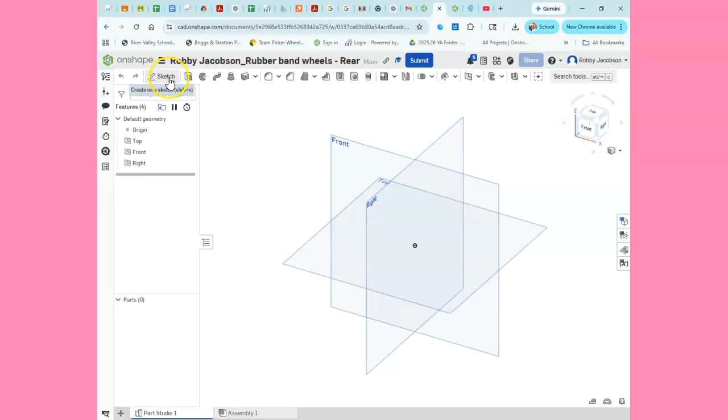So once again, once you're logged into Onshape, you can go to your classes. Go ahead and choose your class. You should have your front wheels submitted. You'll see that in the status. Now we're going to go ahead and click on the rear wheels and start with our assignment. Excuse me. Go ahead and choose whichever view you want. I'm going to choose from the top view and get started with my wheels.

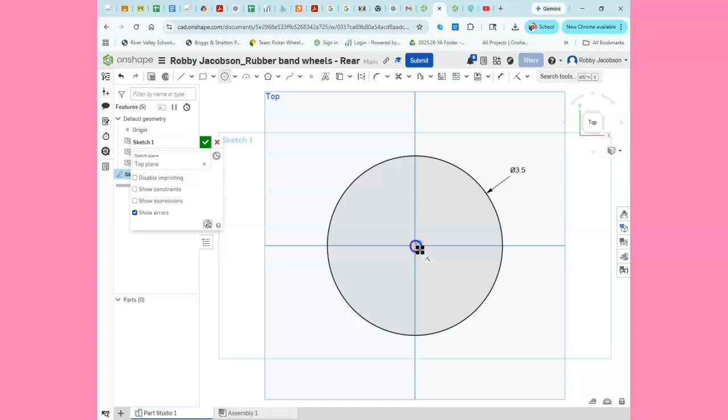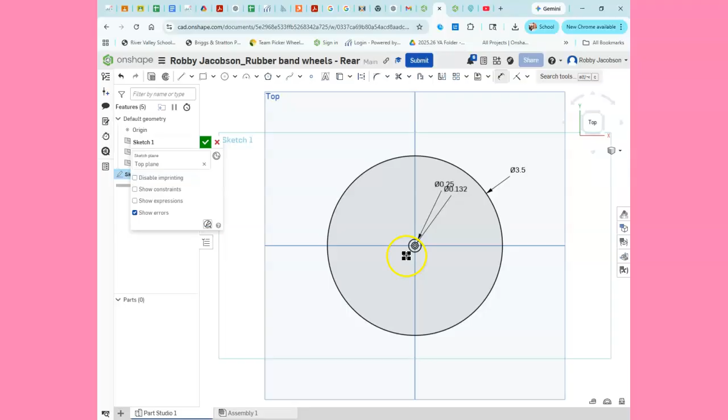So rear wheels are going to be a little bit bigger, so I'm going to make those 3.5 inches in diameter. So my 3.5 here. Once again, I'm going to start with a couple circles in the middle here. I'll start with 2. And my axle hole is going to be 3.35 millimeters. It's just the diameter of the axles we're using. And then I'm going to make this 0.25 for that diameter, which is just the outside of that axle.

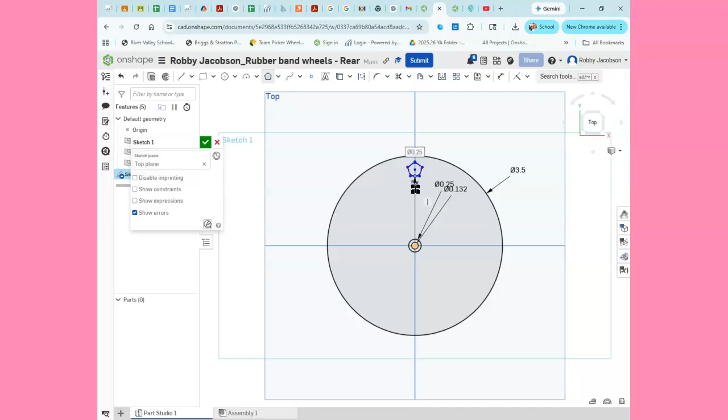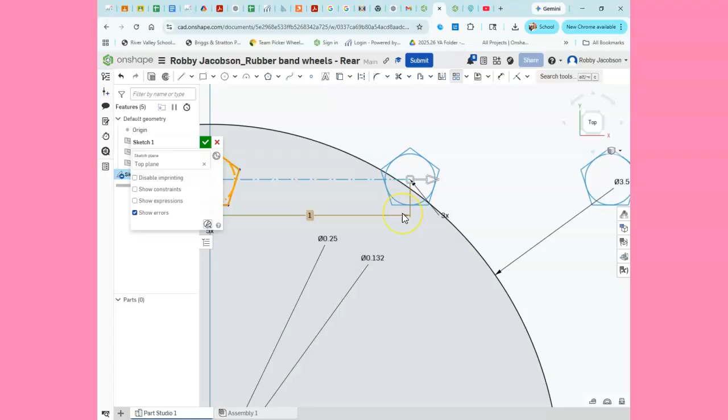And at this point, I can go ahead and create my design. And I can do very similar to what I had on my other one, or I can go even a little bit crazier. So maybe I want to add a couple of these. So one way I can do it is I can make a linear pattern for my shape here. And you'll see that it's going to go horizontal first, and that particular one is right here. I'm going to change that to 1, and that'll make that a singular one.

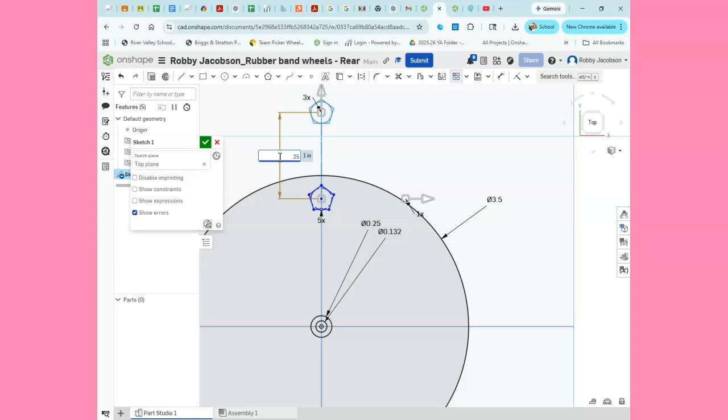And then here, I'm going to go ahead and go -3. Oops, I want to do 3, excuse me. And then here, I'm going to go -0.25. And maybe a little bit bigger than 0.25. So maybe -0.5, -0.5, and that will get my design I want here. I'm going to go ahead and hit my left button to finish that.

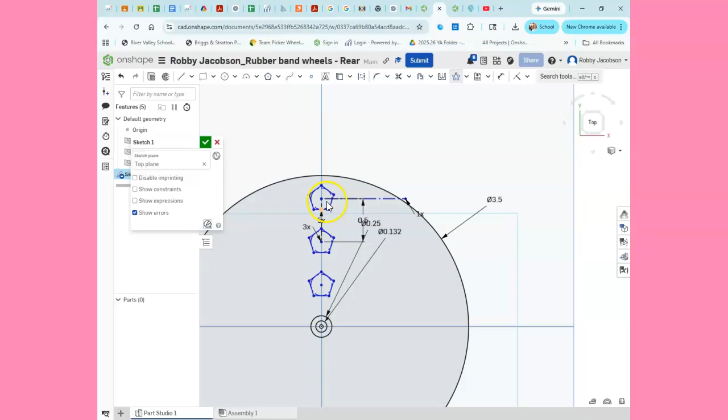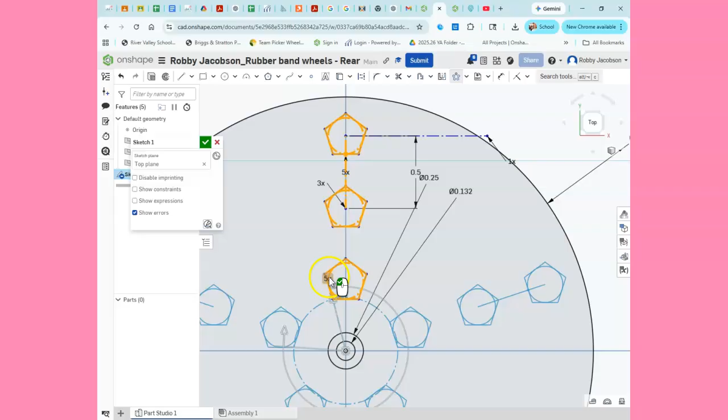Now I can come in, I can do my circular pattern, and I'm going to choose my shapes. This time I'm just going to select over all 3 of them. Once again, I'm going to change my circular pattern here to, let's go 5, and you'll see that it does 5. Let's try 6. 6 might look a little bit better. That'll give me a little bit more even. So we have a pattern there.

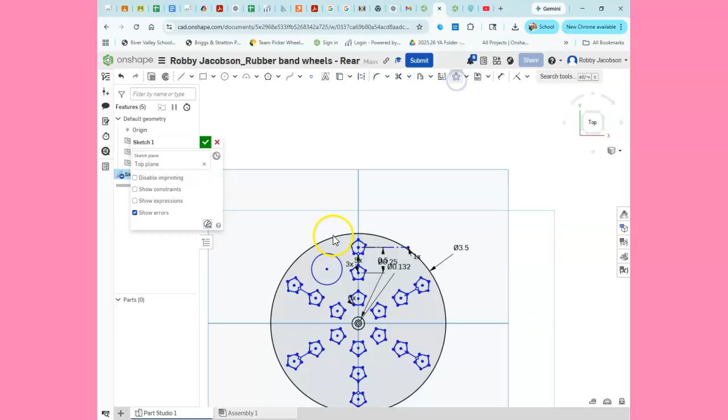So I'm going to go back into my sketch here, and I'm going to just change it up a little bit, because I see I want a little bit better design. And then I'm going to go back to my circular pattern, this time choosing my circle, and change this to 6. And that'll give me a little bit crazier design for that. You can kind of see my design there.

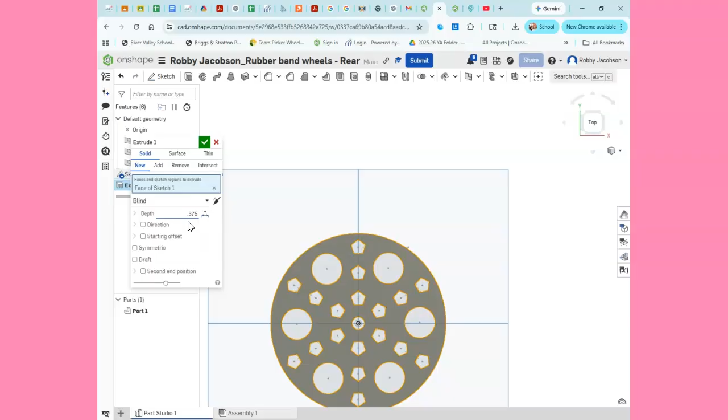So once I'm done, I'm going to go ahead and finish my sketch, and I'm going to choose my main body. We're going to make this a little bit thicker this time. So I'm going to go 0.375, which is 3/8 of an inch instead of a quarter. Just gives me a little bit more surface area on the rear wheels there. Go ahead and hit enter, save it. So there it's a little bit wider. You can kind of see my design there now.

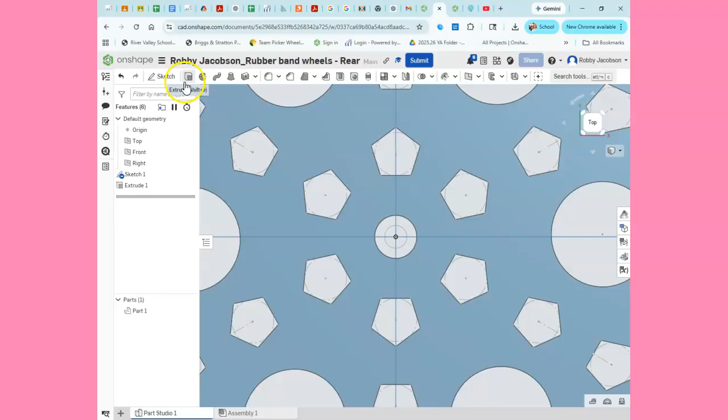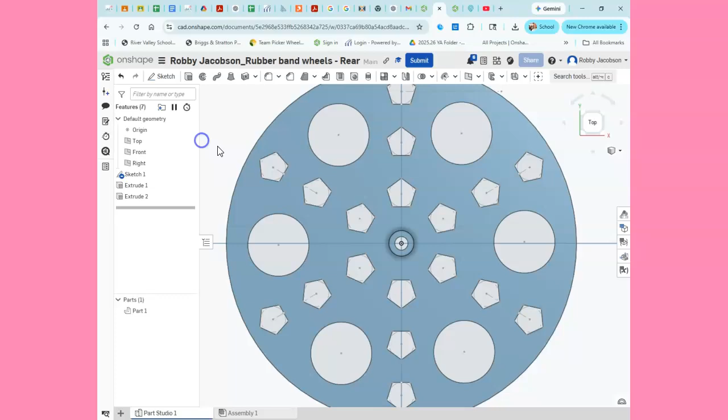Once again, you'll see that my sketch 1 is shaded out. I'm going to go ahead and click the eyeball, and that'll bring that forward again. I can zoom in a little bit closer so you can see it, and I'm going to choose between those 2 circles. That will give me that, and I can go ahead and change 0.5 here. And if you want, you can go a little bit bigger and go like 0.625, and that will bring it out to about a quarter of an inch like it was before. This will be a little bit shorter, but still good enough for what I want to use it for. So you can kind of see my shape there.

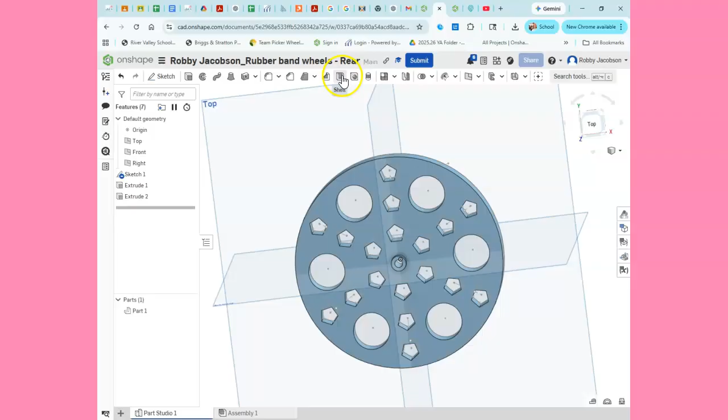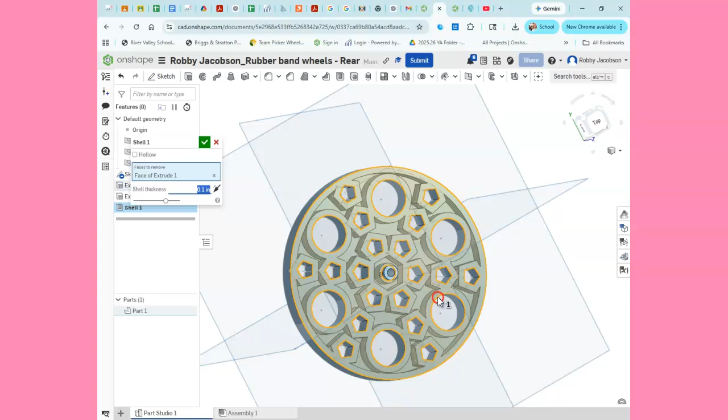And at this point, I can go back in and I can say, you know what, I want to change this up a little bit. So on the inside, maybe I want to come in here and shell it out and shell it to 0.01. No, let's go on 0.091. A little bigger. Let's see. Maybe 0.1. Maybe 0.1 was good enough, and I just didn't realize it. Okay. And that kind of hollows that out and makes that a little better as far as not so thick and heavy. You can kind of see what that looks like there.

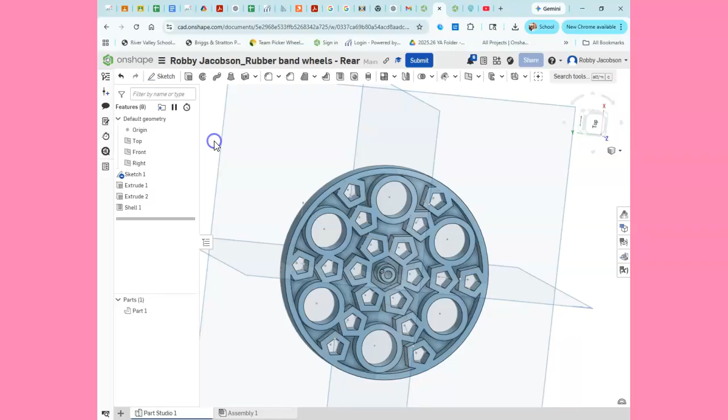And at this point, I can go back in, and if I want to use any of my tools here, I can go back in and change all the ones I want to change. I'm not going to do that, but those are some examples that you can do. But yeah, I think that's good enough. You can see what my shape looks like.

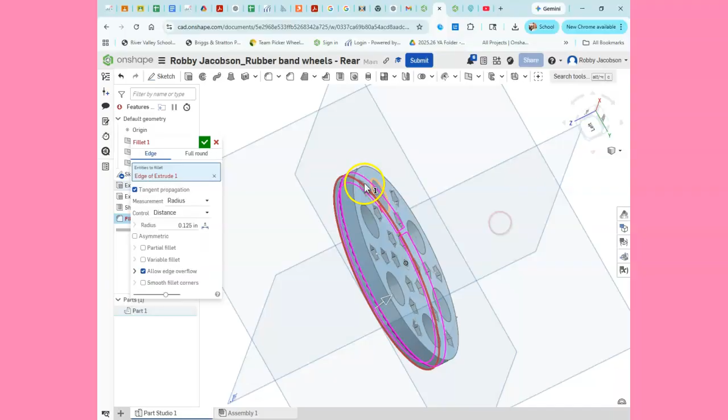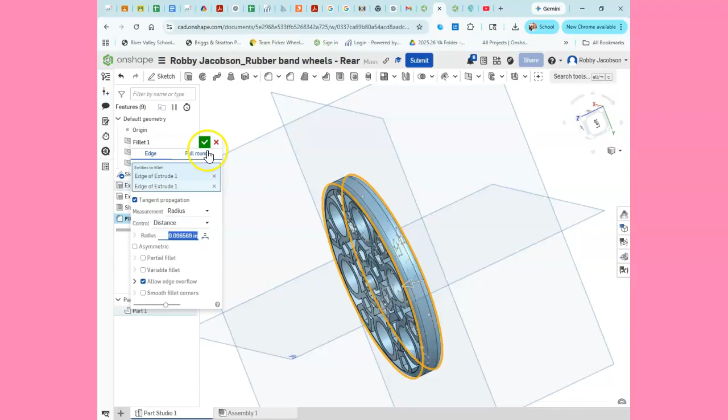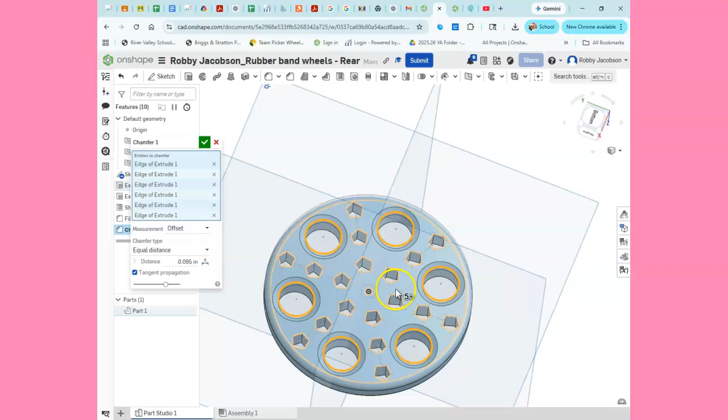And remember, if you shell out the back, you can't do much here. Because if I were to, let's say, shell out the front here, it's not going to let me. It's going to show red because I can't do that. But you can come in here and maybe chamfer some of those circles, kind of make it look a little cooler on the outside. And kind of see what it looks like there.

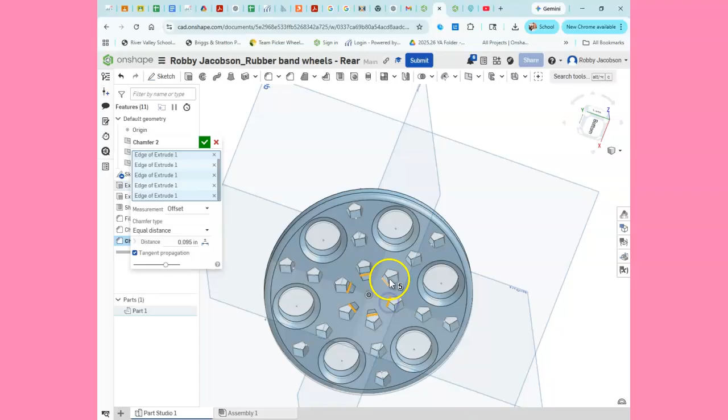Maybe I want to chamfer that one, that one, that one, that one, that one, that one. That'll kind of make it look cool there.

So once you have finished your rear wheel, I want you to create your front wheels there. And when you're finished, we can go ahead and hit submit, and that assignment will be submitted.